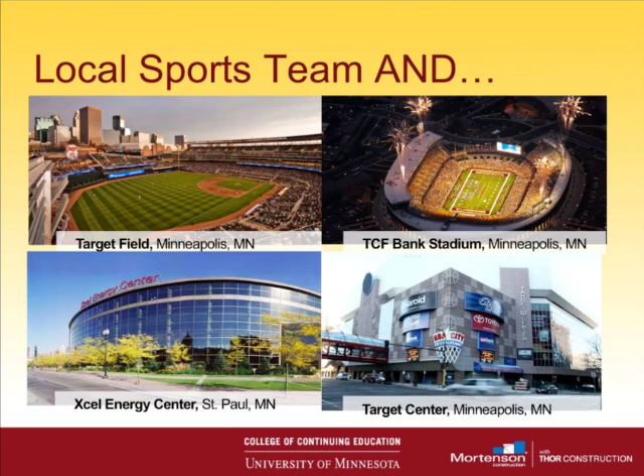So in addition to the local sports marketplace, we also have a major presence in the national sports market. We've completed projects throughout the United States in Louisville, Kentucky, Denver, Colorado, the FedEx Forum in Memphis, Tennessee for the Grizzlies, as well as the Sprint Center in Kansas City, Missouri.

And in addition to the professional sports marketplace, we do a lot of work in the collegiate sports market as well. And 2 of the most recent projects we've completed, Pinnacle Bank Arena at the University of Nebraska, as well as, as Elena mentioned earlier, Pegula Ice Arena at Penn State University.

All right, so let's get into learning about U.S. Bank Stadium.

As many of you are fully aware, it's going to be home to the Minnesota Vikings. The current project construction budget is approximately $860 million. It's used to construct just under 1.8 million square feet.

We mobilized and started on site on December 3rd of 2013, and our substantial completion date is July 29th, 2016, short 5 months from now.

The stadium has approximately 65,000 seats. Included in that 65,000 is approximately 8,000 club level seats, as well as 131 premium suites.

One of the iconic aspects of the building that I mentioned earlier, it has the largest ETFE roof in North America, which is essentially the translucent roof on the south side of the building, which we'll get into much more detail on later in the presentation.

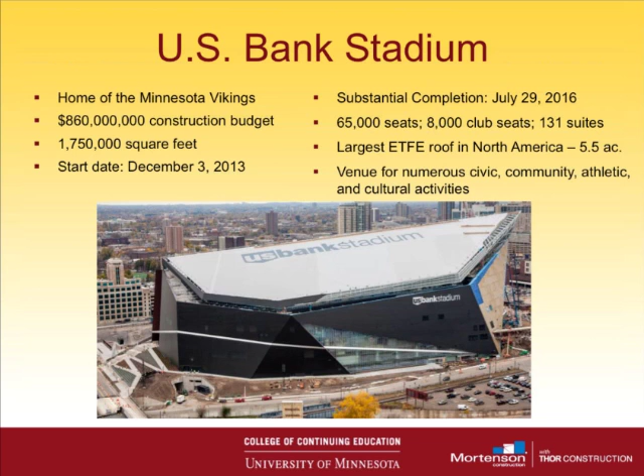In addition to being home of the Vikings, US Bank Stadium is also a venue for numerous civic, community, athletic, and other cultural activities, which we'll look at right now.

The stadium can be configured in multiple configurations to support whatever event is happening at the time. You're looking at the football configuration here, which will be used for all regular season Vikings games, as well as for the 2018 Super Bowl.

There's also a baseball configuration, and it's truly an example of the Minnesota Sports Facilities Authority, the MSFA, and the Vikings team working together to develop a solution that doesn't take anything away from the football layout, but also allows the stadium to be used for many other events throughout the off football season, baseball being one of them.

Now, one thing I want to point out in this slide, on the left-hand portion, you see the seating that was present if we look back at the football layout — there's seating on the entire north side of the field.

Looking at the baseball layout, all that seating has been retracted back. There's the largest section of retractable seating in the world being installed at US Bank Stadium, and the 34 rows by about 400 feet long all retract back to allow the outfield for the baseball configuration.

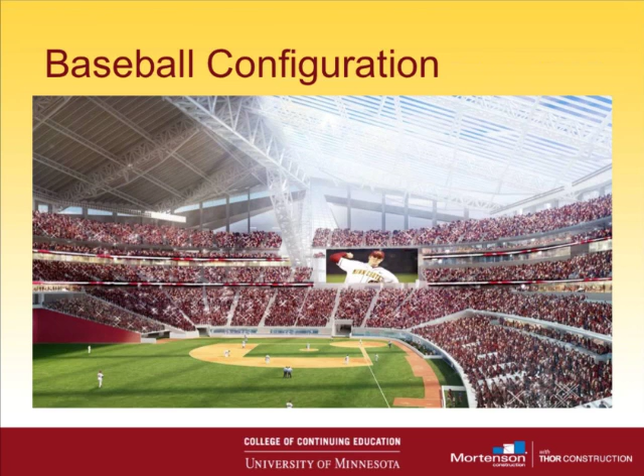The stadium can also be configured to host basketball events. Many of you are probably aware that US Bank Stadium was selected for the 2019 Final Four, which was a big win for the ownership and the community in general.

There's also a soccer configuration that will serve as an alternative to the new outdoor MLS stadium in St. Paul.

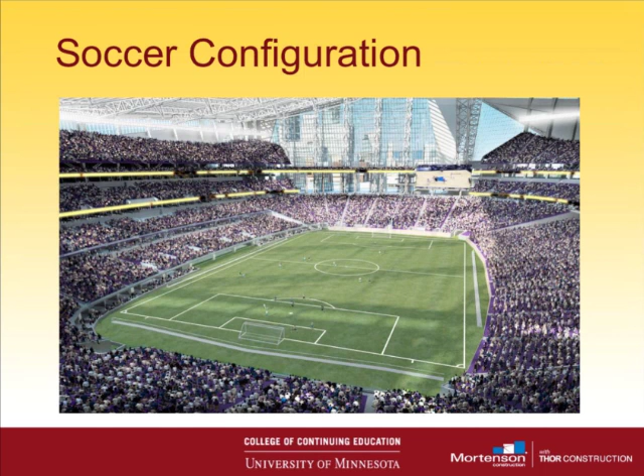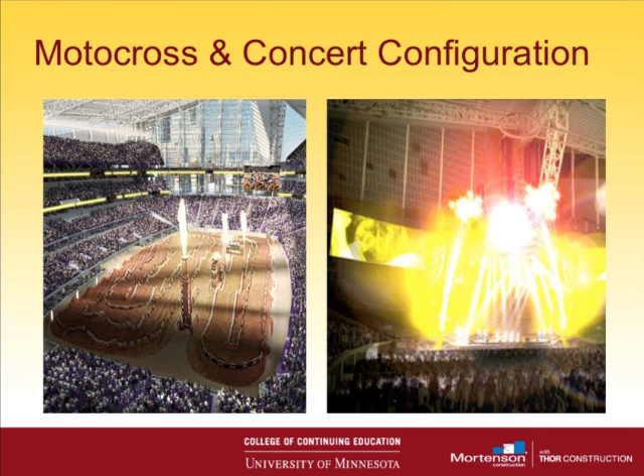In addition to sports, there are also motocross and concert configurations that will really work to maximize the events per year that US Bank Stadium can host.

This is kind of an overlay, placing the old size of the Metrodome, the 3D model of the Metrodome, inside the new US Bank Stadium.

There are many differences from a statistics standpoint. As I mentioned, US Bank has 65,400 seats, which is actually expandable to 72,000 for the Super Bowl, compared to the Metrodome, which was about 64,000 seats. US Bank has approximately 1.8 million square feet, just under 1.8, compared to the Metrodome, which was about half that size at 900,000 square feet.

There are 7 new club premium lounges in the new building compared to 1 club lounge at the Metrodome. There are 8,000 club seats compared to 240 club seats at the Metrodome. As mentioned earlier, there are 131 premium suites available compared to 87 at the Metrodome. And perhaps one of the most staggering characteristics, there's over 12,000 square feet of video board compared to about 650 square feet of video board at the Metrodome.

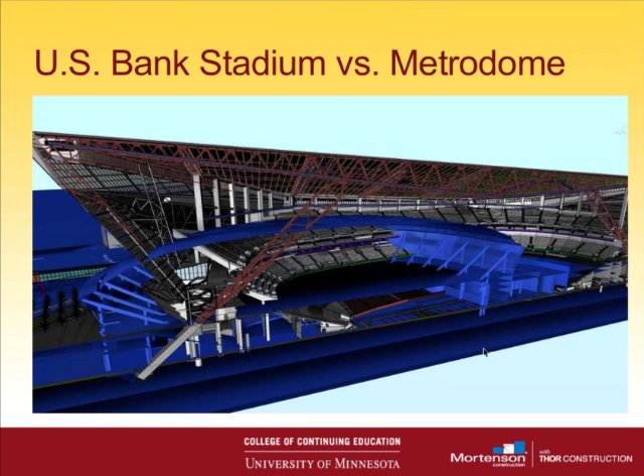So many large differences that should really make a big difference to the fan experience.

All right, moving on to talk about how Mortenson bought out, how we procured and planned the construction. One of the biggest aspects of making sure we're buying out the right package from our subcontractors is going back to the documents — how well are your documents developed at the time that you need to buy out certain scopes of work.

One thing I want you to keep an eye on over the next 2 or 3 slides is which document package we're referencing. You can see listed here, for these 2 scopes of work, the 50% design development documents — and for those of you involved in the construction industry and design aspects of these large facilities, you know that a set of 50% design development documents necessarily doesn't have a lot of detail.

It doesn't have near the amount of detail that you would normally expect when you sit down with a subcontractor to purchase a defined scope of work. But the way these sports projects are typically scheduled is that there just isn't the time available to fully develop a complete set of documents over 1.5 to 2 years with an architect and design team, and then have the contractor go out and bid that scope of work.

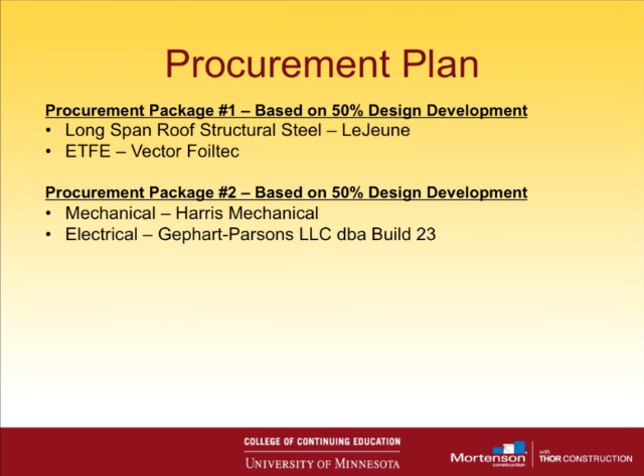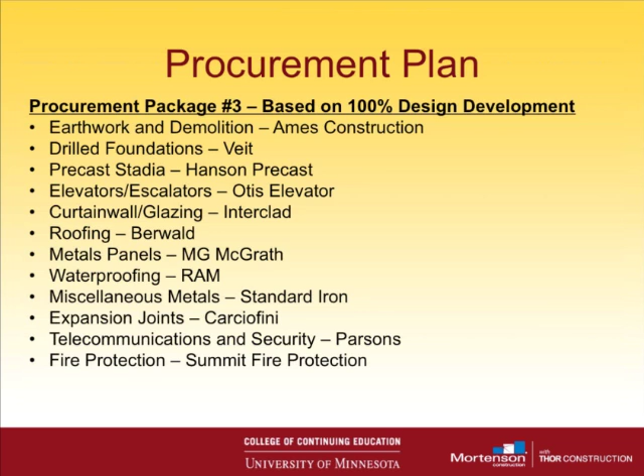I'll go through these other procurement packages. Again, procurement package 3 included our earthworks, drilled foundations, our stadia, a lot of our enclosure, as well as waterproofing and an early miscellaneous metals package. Those are all elements we felt we needed to get going on, buy out, and start planning early. So we continued to work off design development documents at that point.

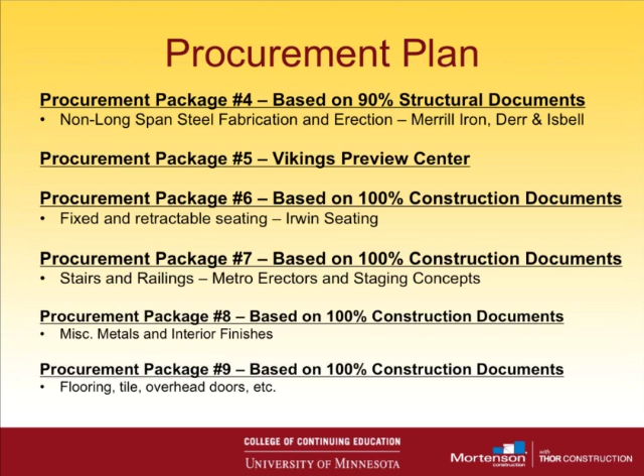Lastly, to finish up the procurement discussion, there are always some items bought out by ownership. Sometimes they have relationships in the industry, so they want to procure specific scopes of work. Scoreboards was one of them, for the MSFA and the Vikings - they bought that out through Daktronics.

FF&E is typically procured by ownership as well. And one of the newest components of these large sports facilities is the distributed antenna system, or DAS system, making sure everyone has wireless capability, or as much as they need - so when 60,000 fans get into the building, everyone's phone still works.

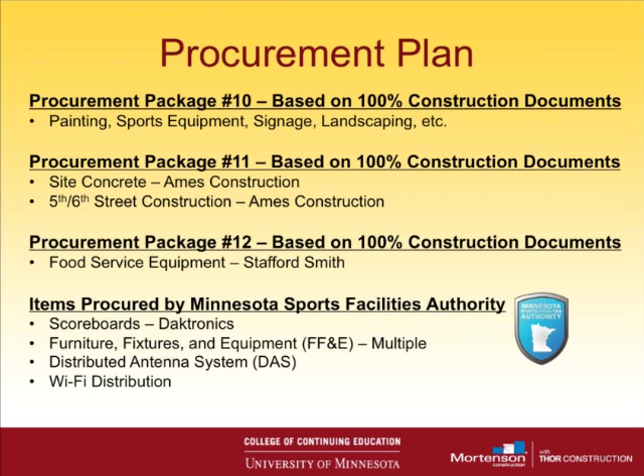Moving on from procurement - Mortenson typically, during the planning phases, develops a 3D model of the job site and comes up with a site logistics plan, which is typical for these large construction projects. From a site logistics standpoint, it's all about managing your space on site and making sure materials can flow in and out of the job without any issues.

On this slide, north is to the top. We identified early on that we were going to utilize the northeast corner of the job site to bring material in and out of the main bowl area, which you'll see in a few slides - how crucial that became to managing our space on site and really the steel fit up and steel erection activities.

The Metrodome was located on the west portion of this site. We started our concrete operation on the east and built our whole schedule out of the east side of the job so we could start as early as possible while the Metrodome was still in place. It happened to work out well that the permanent loading dock for the building also came out of this northeast corner, so we actually pulled the construction of that loading dock up in the schedule so we could utilize it for the balance of the project.

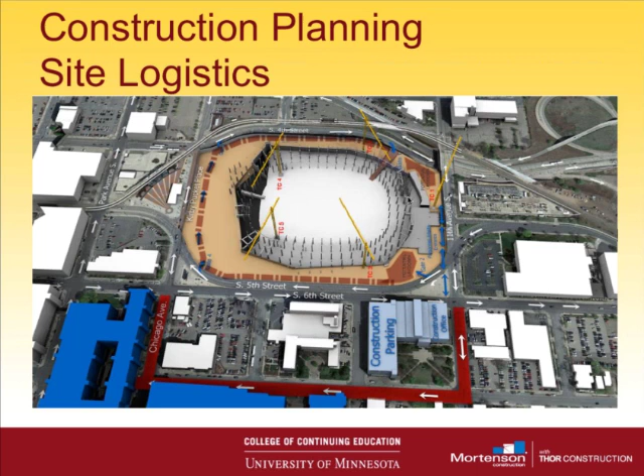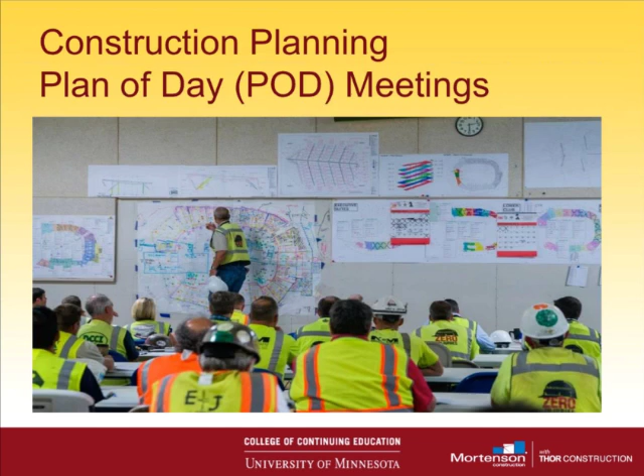In addition to just planning site logistics at a high level, we also plan our daily activities at a 6 a.m. meeting every single day with the superintendents and many of the job foremen on site, just to talk about coordination, what cranes are going where, who's swinging in what direction, and what work needs to happen on each level of the building.

You can see that we had multiple gates. This is along 11th Avenue, three gates there to shuffle material in and out. There's a gate off the southeast corner, another gate off the southwest, as well as our main loading dock that came into the northeast corner.

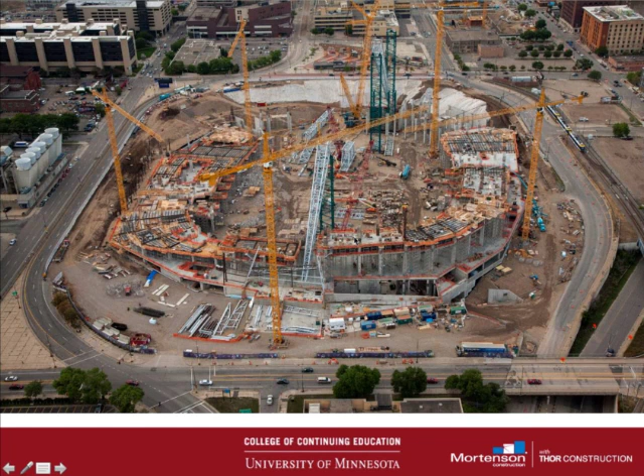One other tool that we use is called Virtual Design and Construction, VDC, to better plan the execution of our work. VDC technology allows us to build faster, smarter, and leaner than we ever have in the past. This is just a fly-through of what we were able to create with VDC technology to give the ownership a preview of really what their locker room is going to look like.

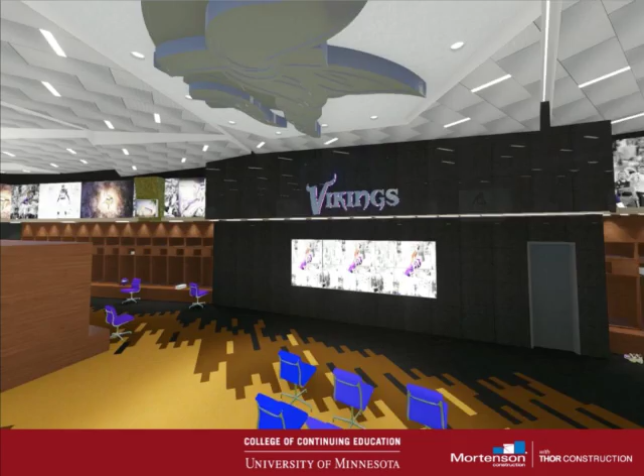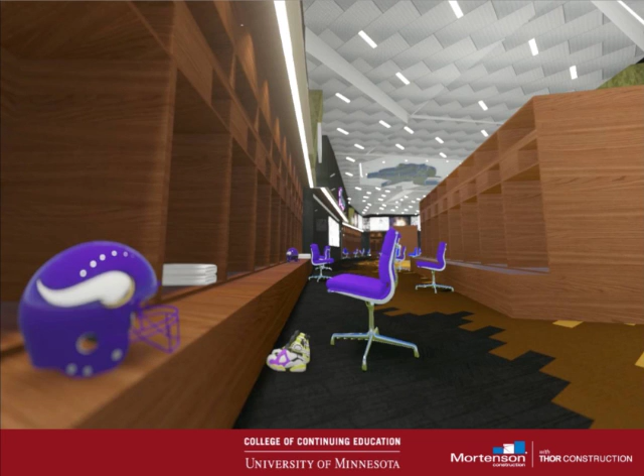In these sports facilities, the locker rooms and some of the club spaces are often one of the most talked about and debated rooms throughout the building. Using these types of tools gives us a perfect opportunity to show the ownership group, and frankly the head coaches and the players, and we can get feedback from multiple sources without having to walk those individuals through the spaces after they are built.

Typically these large sports projects are historically notorious for being behind schedule. There's all kinds of horror stories out in the industry about jobs having 50 to 60,000 item punch lists, finishing 6 to 8 months behind schedule. Mortenson is truly committed to making sure that we don't have jobs delivered that way. We just don't believe that it's good customer service.

We use a Primavera P6 scheduling software to develop and manage our critical path schedule. I'll refer to it as the CPM schedule for all our projects. We truly use that to ensure we deliver our projects either ahead or at a minimum on schedule. A CPM schedule is the tool you have; it's truly your roadmap for how you're going to complete the job on time.

There are too many activities that go into a construction project of this magnitude to manage it any other way, according to us at least. Our superintendent, Dave Mansell, is a fanatic about managing his projects to a CPM schedule. The use of that schedule is critical to identifying where you're having your schedule issues, what is truly your critical path, and whether an activity that doesn't finish on time has the potential to delay the project as a whole.

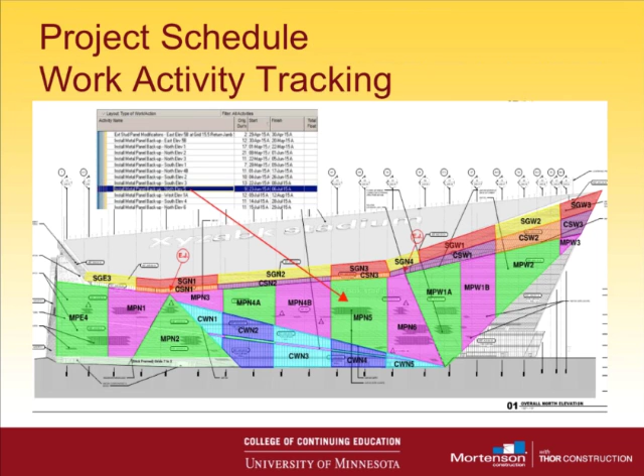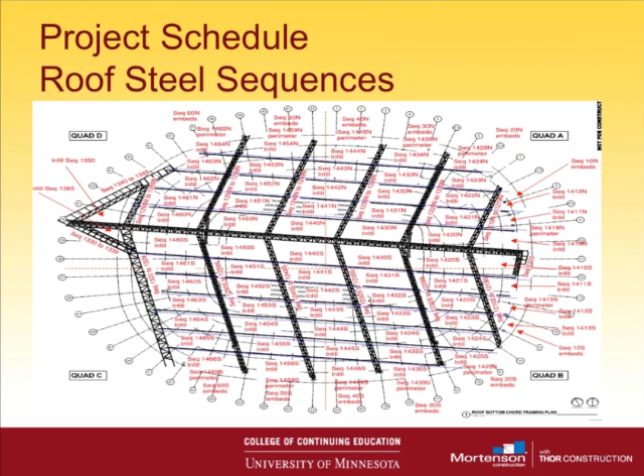This is another example of what we did with the roof steel. We came up with a very detailed erection sequence map like you're seeing here, and we created a separate erection, bolt-up, and steel detailing activity for every single steel sequence on the project. A lot of people would hear that and say it's unnecessary, but based on our experience building these buildings, we think it's absolutely necessary.

Okay, so enough about construction planning and theory, let's talk about actual construction. The Vikings played the last game in the Metrodome on December 29, 2013, defeating the Detroit Lions 14-13. It was a short three weeks later that the dome inflation units were turned off, truly commencing the demolition of the Metrodome.

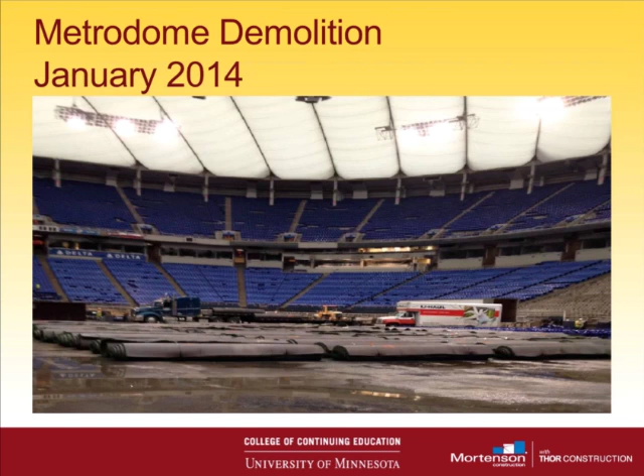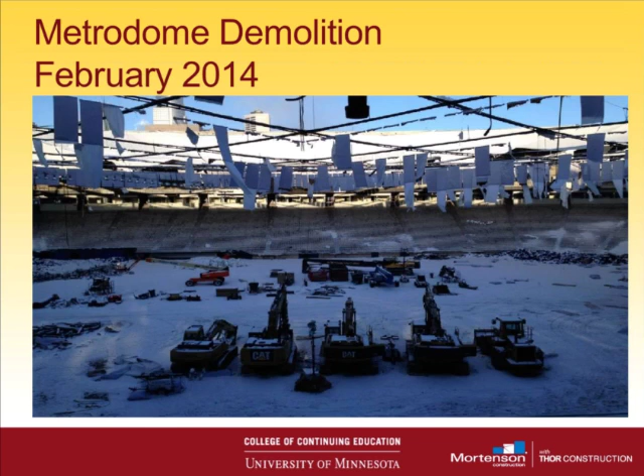We bought out all the site work, earthwork, and demolition through Ames Construction, who also involved Frattalone to help them complete the demolition of the dome. On February 23rd, a Sunday morning, we demolished what we called the upper ring beam of the Metrodome.

I'll play this a few times so everyone can get a good look, make sure you can see as much of it as you want.

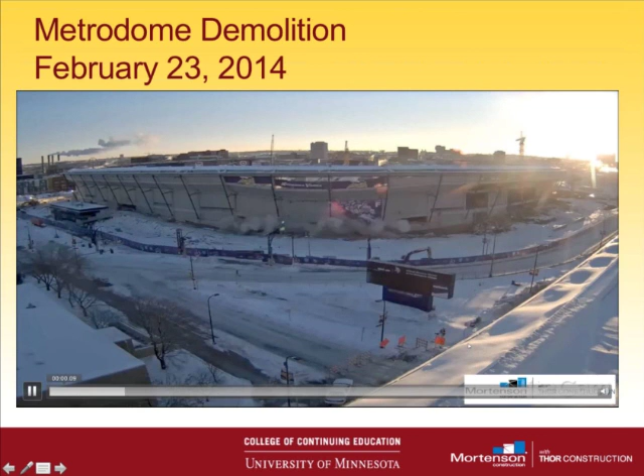But as we got into the demo, we came to realize that it was truly a safer option to implode at least part of the building compared to just picking at it with construction equipment, where you're limited by how far away you can be when using certain pieces of equipment. Even some of the largest equipment in the industry presents a significant safety hazard.

So because of the downtown setting of the Metrodome, initially we thought maybe we could avoid having to implode part of it. But the more we got into it, we came to realize that this was truly the safest option, and things went very well.

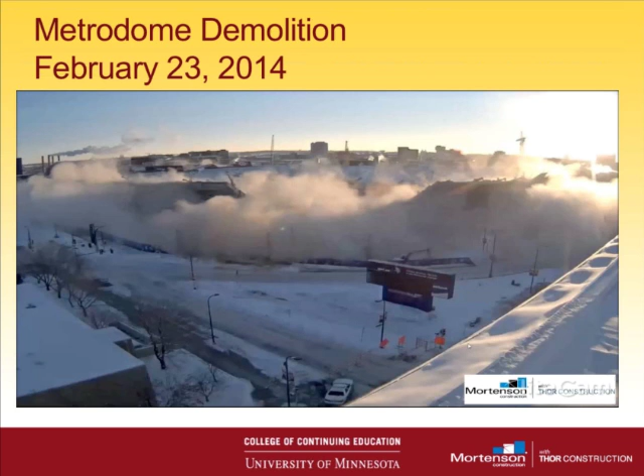With the demolition of the Metrodome, that enabled us to continue excavating approximately 900,000 cubic yards of material out of the site and really clear the way for our concrete operation. For those of you familiar with the southwest part of the Twin Cities, a lot of that material ended up at the interchange of Highway 169 and Highway 62.

That was going on during the early phases of U.S. Bank Stadium as well. As far as our structural concrete operation, it started in January of 2014 and continued through mid to the end of June of 2015. There were over 12,000 tons of rebar on the project, equal to the approximate tonnage of the roof steel.

We poured over 100,000 cubic yards of concrete, some of which you see in the photos here. This is the east buttress.

At each end of the main ridge truss, there's what we call the buttress column that basically accepted the entire load of the main ridge truss, about 990 feet long, and took that load down into the bedrock.

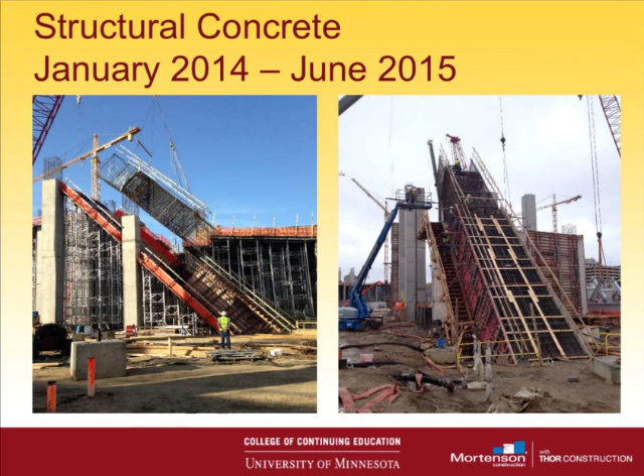What you see here basically transfers all that load about 40 more feet down into the ground. We actually had to use a 30-ton chiller just to thermally control the concrete as it cured out on this massive column.

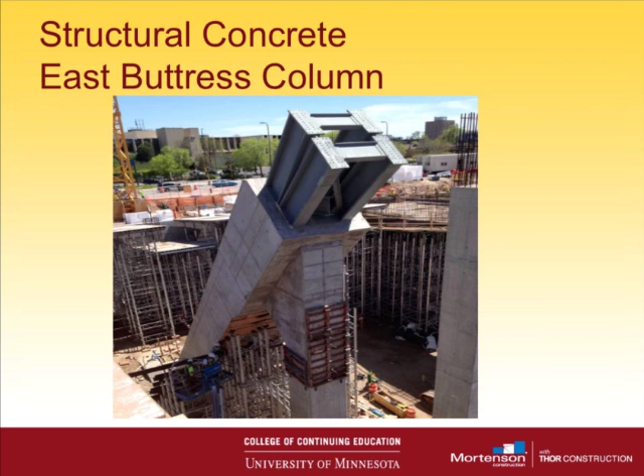Just another photo of the completed east buttress column, and basically this whole setup was mirrored at the west end of the project as well.

The majority of the concrete structure at US Bank Stadium was constructed using pan and joist decks. There were over 110 separate deck pours, and for those of you who work in this industry, we had 8 different leading edges of our pan and joist decks happening at one time at its peak.

That's a lot for both Mortenson and our subcontractors to manage all at one time, but it was truly something that we needed to accomplish to finish the job in the time frame that we needed to. Really, it's all about getting your structure up in place so you can control the pace of the project, and by having that many leading edges at one time, it allowed us to do that.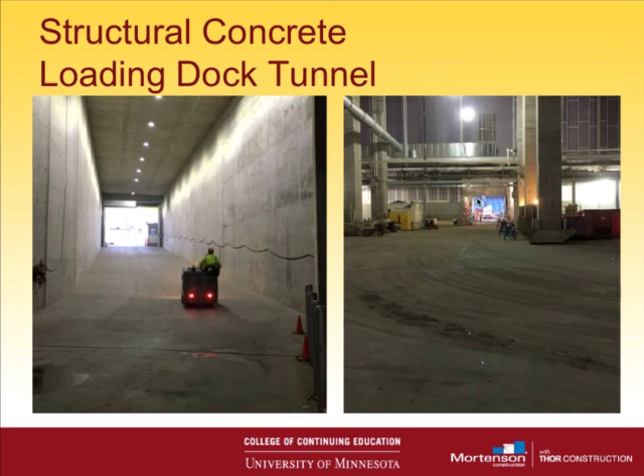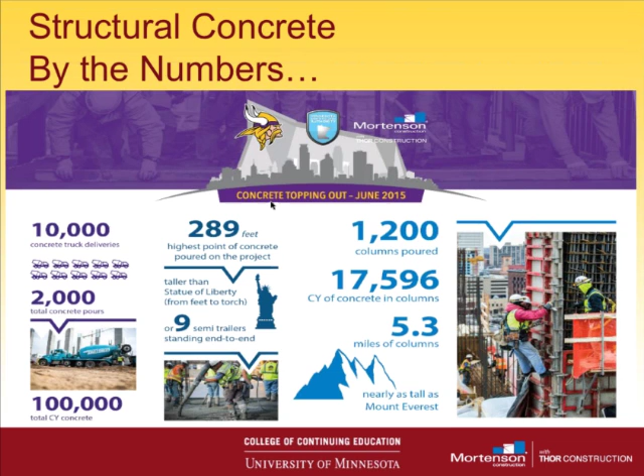Okay, so structural concrete, looking at the numbers. This is a flyer we distributed during our concrete topping out party in June of 2015. There were over 10,000 concrete truck deliveries, over 2,000 concrete pours, and well over 100,000 cubic yards of concrete. It wasn't all just foundation and decks. There was a ring beam surrounding about 80% of the upper roof that was poured at about 290 feet above grade level, a substantial effort to get concrete up to that height.

Once enough of the concrete structure was underway, we started progressing the structural steel in July of 2014. US Bank Stadium is unique in that on a lot of sports projects you'll leave out a section of the arena or stadium, walk the crane out, and complete that section later. But the unique geometry of US Bank Stadium, with the skewed aspect of the main ridge truss and how some of the secondary trusses tie into it, didn't allow us to build one end and work our way out. So we were progressing the steel from both the east and west sides at the same time, and there were massive sections of the main ridge truss that needed to be pre-assembled in the bowl area and erected, requiring a very substantial crane.

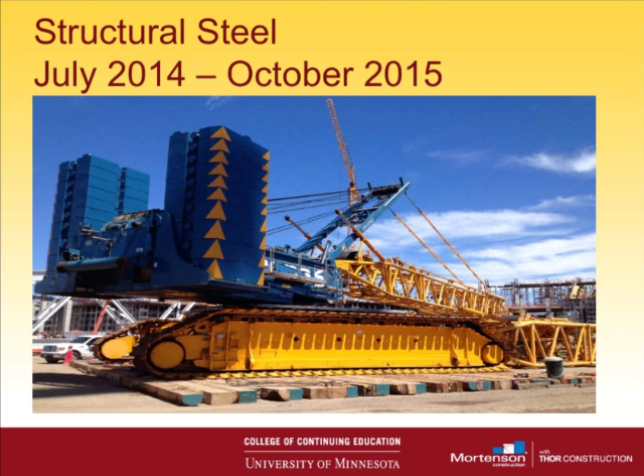What you're seeing here, a lot of you probably saw on the news at the time it was delivered and erected — it's a Demag crane, delivered on approximately 70 flatbed semi-trucks to the stadium. It's one of the 3rd largest cranes in the world. It has 1.2 million pounds of counterweight, and there's a carriage further off the back, which you can't see in this photo, that allows another 250,000 pounds of counterweight. Our largest pick on the job was approximately 720,000 pounds.

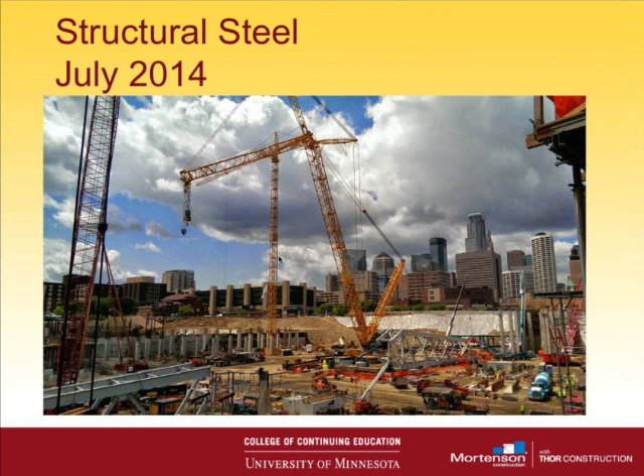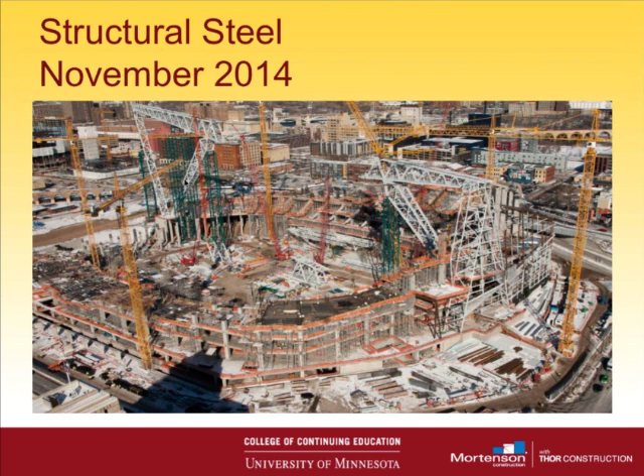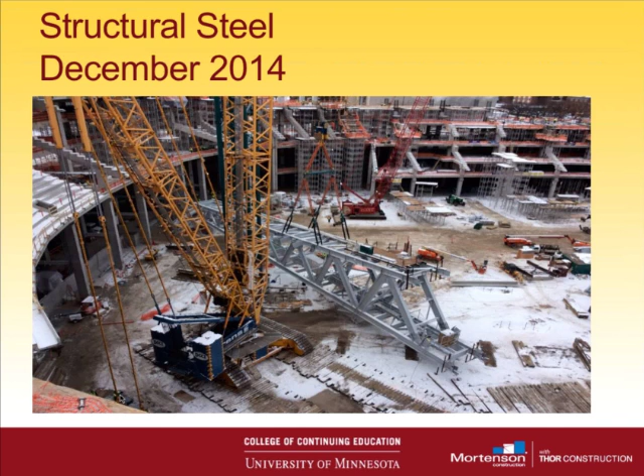In June of 2015, we actually made the connection. The majority of the ridge truss was built up in sections, like you saw a couple slides ago, but the last two connecting pieces we put in as sticks right in the middle. Even though all the planning and intermediate surveying during the erection of each piece tells you it all lines up, there's still a sigh of relief you breathe when it all connects together.

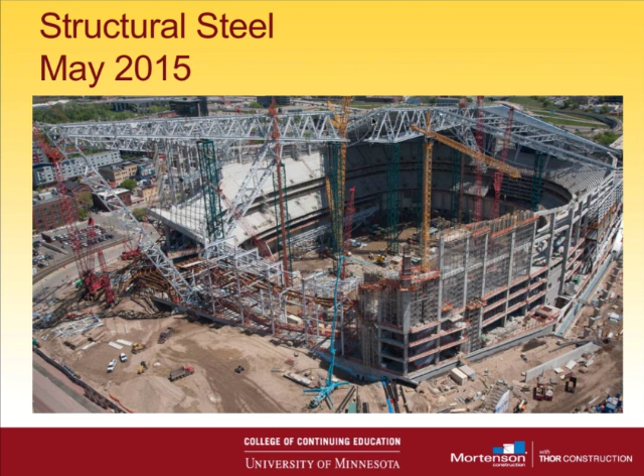Lejeune Steel fabricated all the roof steel, and Danny's Construction Company out of Shakopee was the steel erector—they both did a fantastic job.

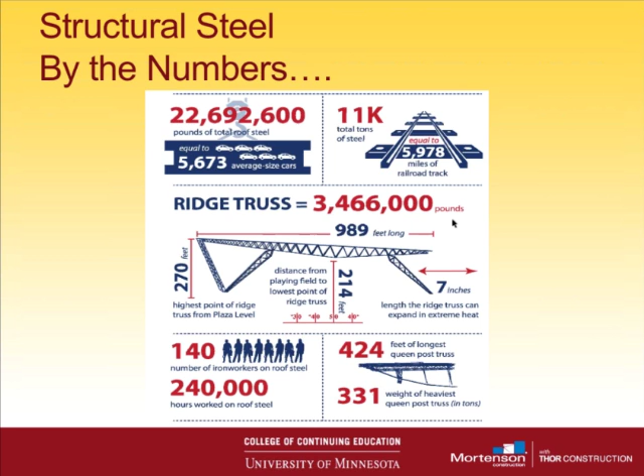All right, moving into one of the most iconic elements of the building I mentioned a few minutes ago—the ETFE roof system. What is ETFE, and why was it used on this project? Why is it gaining momentum on the design side of a lot of these buildings? It's used because of its translucent nature, providing an open air feel to a space without exposing the inhabitants to the climate outside, which is important for Minnesota, especially during at least half of the football season.

The material is lightweight, flexible, durable, and has a highly tensile strength. It's been used throughout Europe, parts of Australia, and parts of Asia for quite some time. For those who remember the Olympic Stadium in Sochi, as well as the Beijing Water Cube, those projects all constructed or integrated ETFE into the design and construction.

U.S. Bank Stadium is unique—there are 75 total cushions, and the largest of those is approximately 10 feet wide by 300 feet long, the largest cushion our subcontractor Vector Foiltec out in Bremen, Germany, had ever constructed or put in place.

Each ETFE section, or pillow, is inflated using 4 air handling units placed on the inside of the ridge truss that runs the full length of the building. There's also a dot or frit pattern on the outer layer of the ETFE that reduces the solar heating effect on the building, still allowing light to penetrate while directing a lot of the UV rays out.

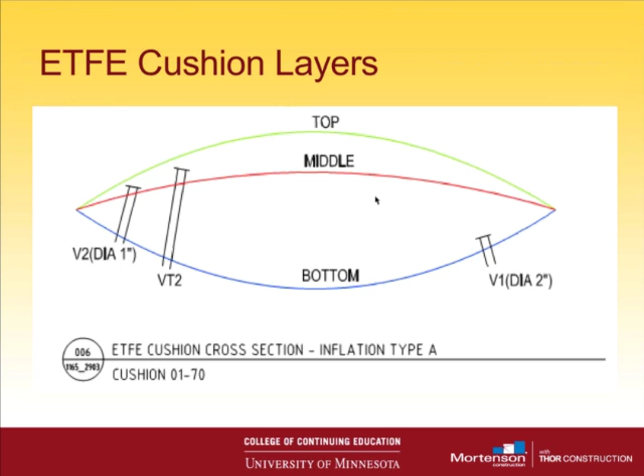Each chamber has air circulated throughout for basically the life of the building. It's not a high pressure system—it's inflated to about 5 psf. There are 4 main inflation units with redundant motors, so if one goes down, the whole roof doesn't start to sag and collapse. It's truly a very redundant system.

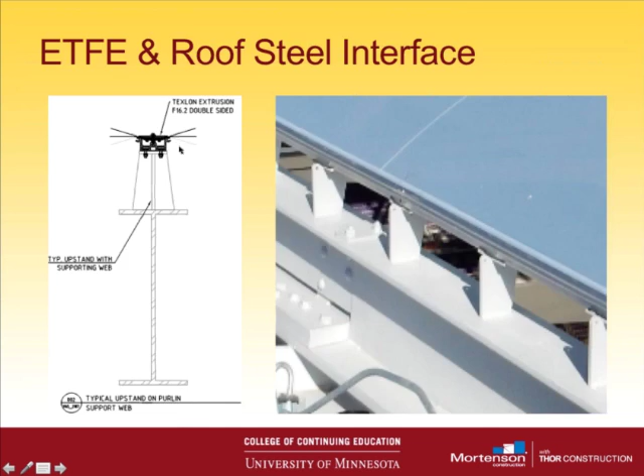The more we learned about it, the more we liked it. It allows them to put that netting system in place and then install all of their accessories, fully bolting down all of their extrusions that are sitting on the upstands, which I'm running the cursor over right now. They use that as a working surface the entire time, up until the point they start pulling the cushions down from the top of the roof.

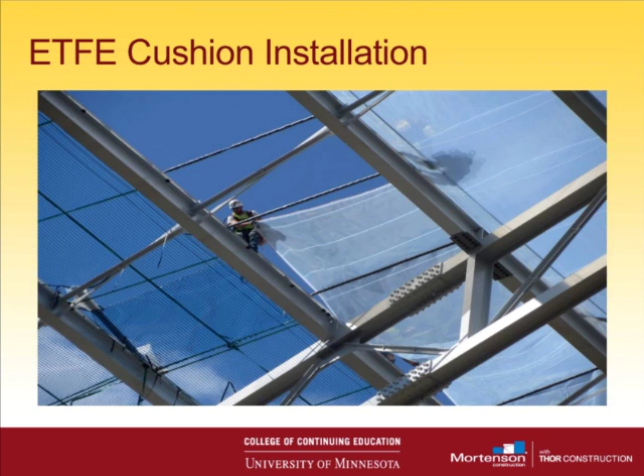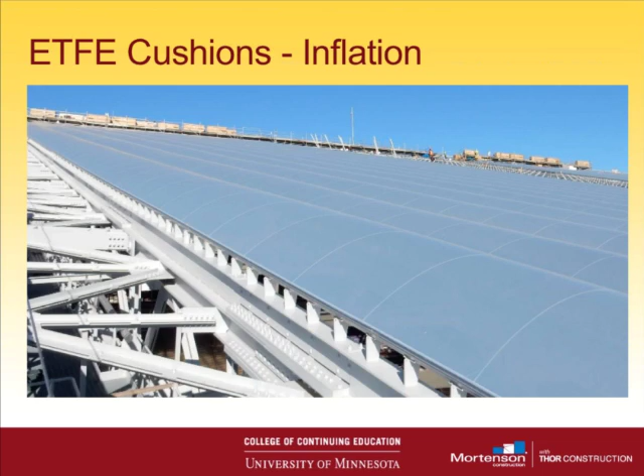As far as the sequence, I want to jump back to our main slide here. We basically needed to follow the erection of the roof steel with the ETFE. One of the critical milestones in our schedule was getting the ETFE installed and completed by November of 2015, to allow the balance of the interior finishes to progress. It would have been very difficult for us to make a completion date of July 2016 without having the building fully enclosed by the winter, by November or December of 2015.

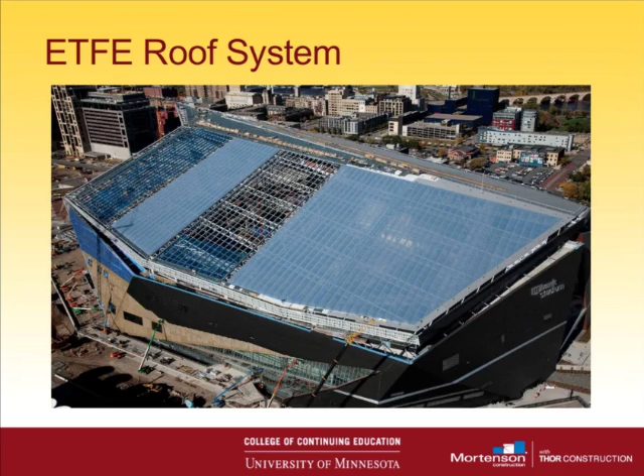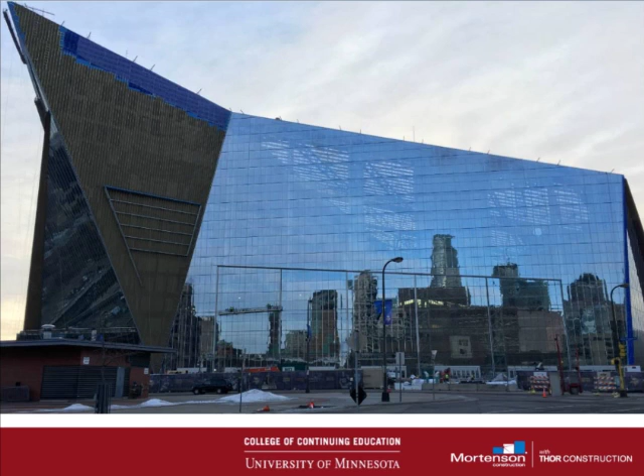That gets us to the last iconic element of US Bank Stadium, which is the operable doors. I'm sure some of you have seen news reports about the operable doors recently. We were opening and closing a couple of them to facilitate some construction work around the doors a week or two ago, and it got a lot of attention.

There are 5 large operable doors on the project. I'm running my cursor over the northernmost door, door 1, 2, 3, 4, and 5. The shortest door has a jamb height of 75 feet, with a sloping head condition up to the tallest door at about 95 feet.

As I mentioned, there are 5 operable doors. The dimensions vary in height, as I just went over, but each door is the same width—they're all 55 feet wide, for a total width of 275 feet. The heaviest door is approximately 100 tons, and all that weight is basically pivoted around a 3-foot diameter steel and concrete column, which I'll show you in more detail shortly.

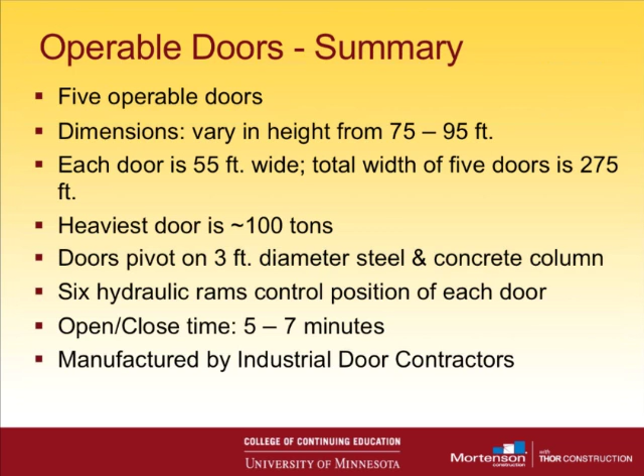The doors are controlled, opened and closed by 6 hydraulic rams, basically 3 different pairs that work in tandem to push and pull, opening and closing each door. Each door has an opening and closing time of 5 to 7 minutes, and the doors were fully manufactured by Industrial Door Contractors out of Columbia, Tennessee.

Industrial Door Contractors, or IDC, was integrally involved in helping us develop the design. Throughout the design process, we worked on these doors for approximately 2 years, working hand in hand with HKS and Thornton Tomasetti.

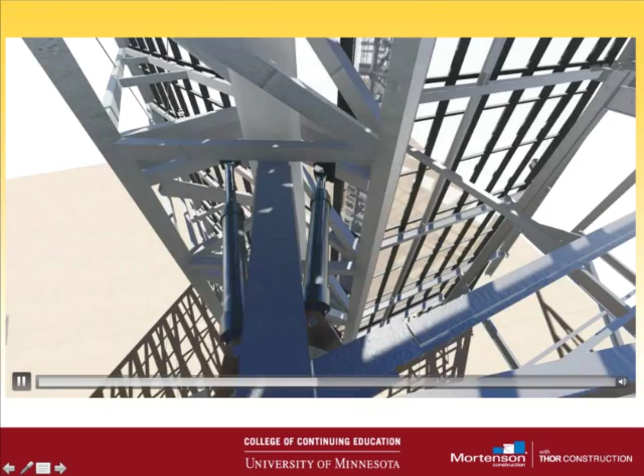This fly-through that I'm showing now gives you an idea of how the doors function. These horizontal members we call wing trusses—there are 49 wing trusses throughout the doors. They're hung off of these 3-foot diameter columns, so the wing trusses tie into what we call the Tri-Chord truss, which then attaches to the 3-foot diameter column at the top and the bottom.

There are 2 bearings with each of these doors: one at the base, which receives the entire load of the door, and one at the top. As you can see, these hydraulic rams function in tandem, as I mentioned, pushing and pulling to open and close the doors.

The columns had to be so rigid that with the eventual design of the doors, glass needed to be applied to the outside of the structure, so the doors needed to be rigid and stiff enough that as we were installing the glass, the steel didn't start to sag and crack the glass we had just installed.

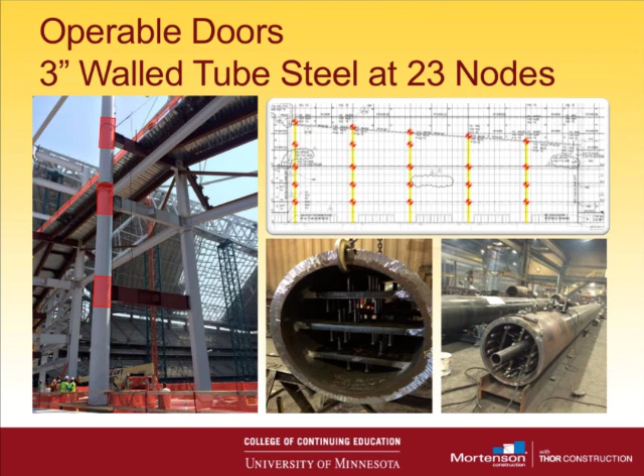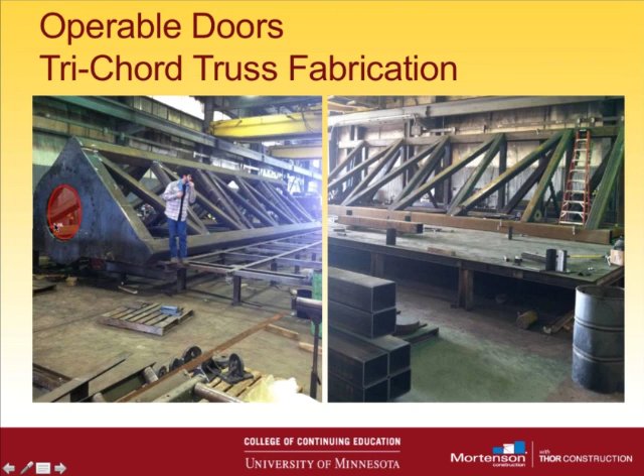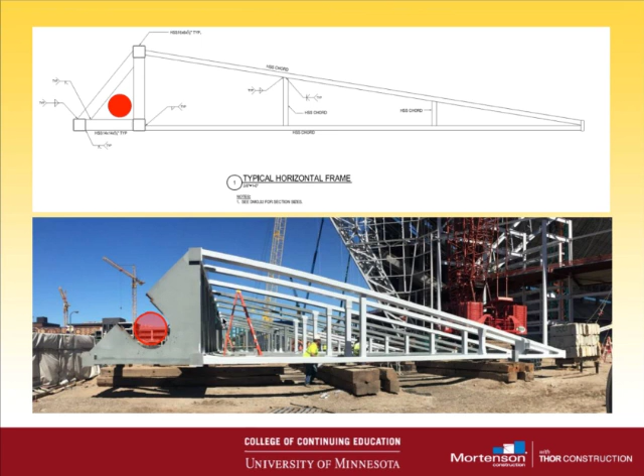Here's a photo of some of the horizontal wing member trusses. The outside of the door in the bottom photo is facing the ground. These trusses were much too large to be shipped down the road as a complete system, so we delivered each truss to the job—I think we fit 5 on a truck, 4 on another—and then assembled and erected them in place on site.

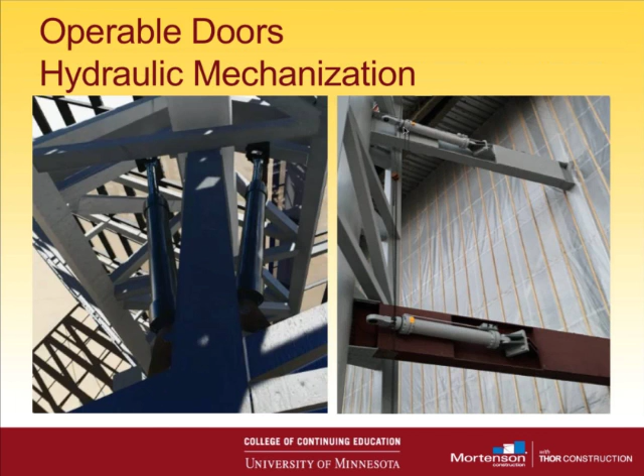Lastly, there are a couple more photos showing what I displayed in the fly-through of the operable doors compared to what we actually built on site, shown on the right. The doors are controlled with hydraulics—there's a single hydraulic pump unit on one of the upper levels of the stadium, just south of the doors, that pumps hydraulic fluid out to service all the different hydraulic rams.

All right, and with that, I will take any questions.